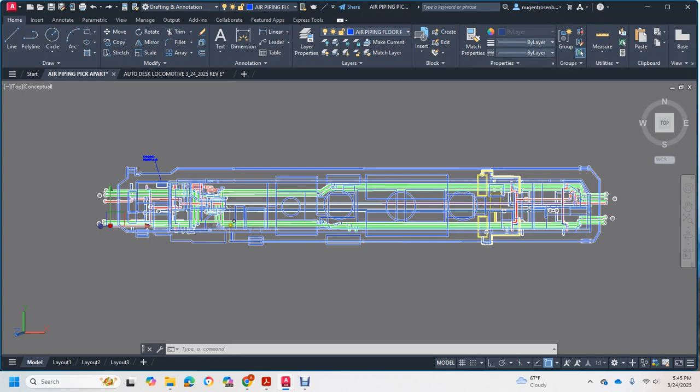Alright, the blue is basically the floor plan. I'm going to move up here. I marked all the valves with spheres.

So the red is a sanding valve. This over here, where the cursor is, that's your dead pneumatic, and then blue brake pipeline to the trucks, and green to the controls. And this is the front, and we'll just pick out like a sphere.

Each sphere has a hyperlink, and you push control-click, and it will bring up the different videos. I've made each one of these maintenance videos.

You may not be able to hear the audio because it's on a recording and I'm using the microphone, but these would be the ball cutout cocks.

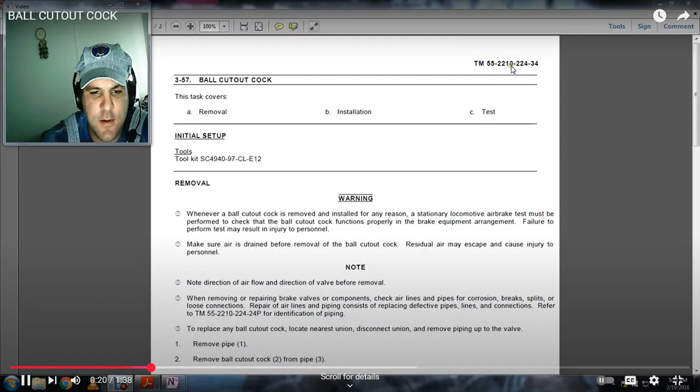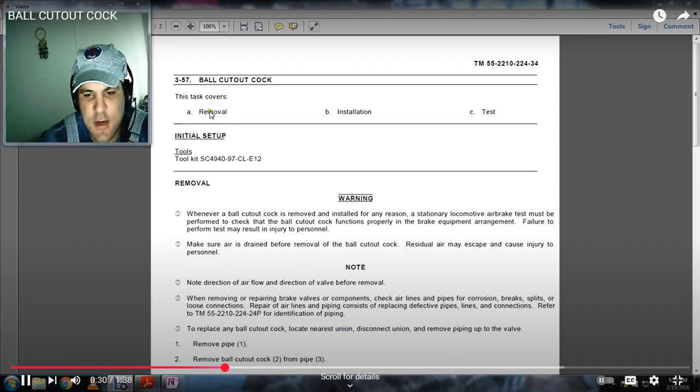It goes, this would be TM 55-2210, the MSN is 2210 for diesel freight, 34 tells you it's a technical manual, 55 is the series, and this one covers removal, installation, testing, and we can skip it ahead.

I took it, there's me, this is years ago, and so here would be your ball cutout cock on a Davenport, and it goes over the installation and repairs, so let's just pick a different one.

So up here we have the sander valves, let's just click this one, see what it brings us to. We've actually opened up what's known as the cutout cock strainer, and I clicked that 3 times.

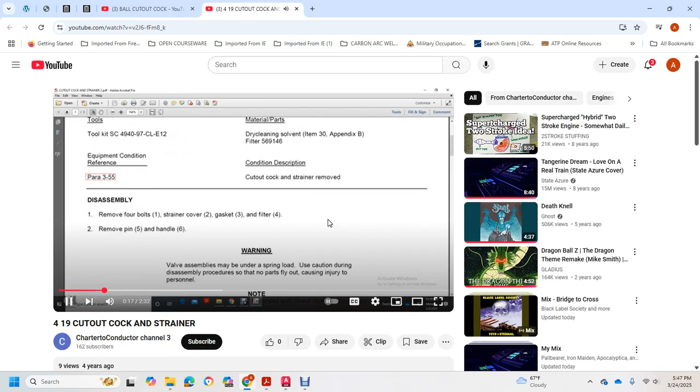Let's see if we can see any more pictures. And it gets exploded right about here.

So basically, most of the air piping schematic has never been changed, and it tells you how to do the maintenance and repair and disassembly.

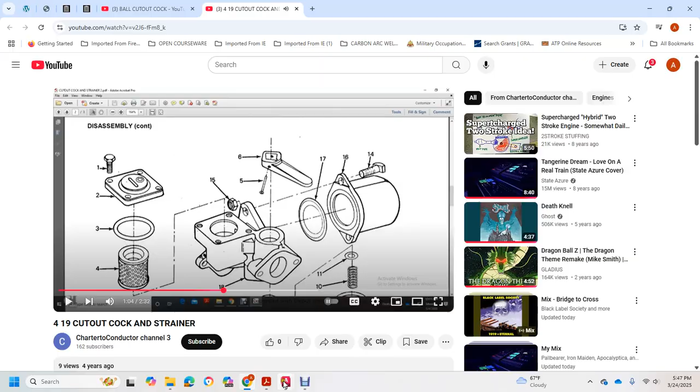So basically, this is all hyperlinked together. Each sphere is a different valve, and it's all hyperlinked. Blue goes to the pipes. Red is your sanders. Green is your controls.

And then this shows, if you follow this line here, this way and this way, you can see that it's a double control stand.

So I split it in half, and then we'll pan to the left. It travels down about halfway, and then you would meet a cutout cock on the sides over here by the fuel pump somewhere, and you could dump the air in case of emergency from there.

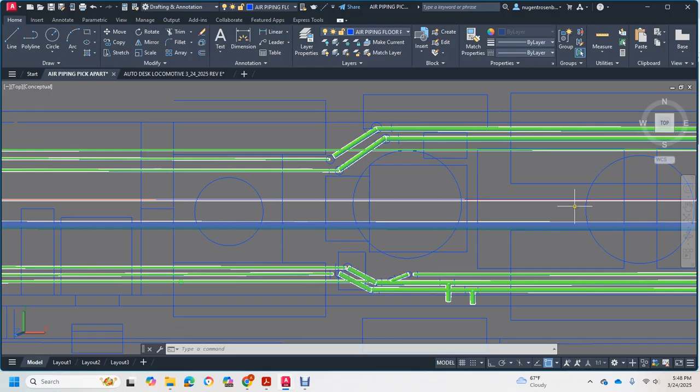And then we move on to the rear, and like I said, the green is the airline, blue is the trucks, red is the sanders, and then yellow over here shows our air compressors and our air reservoirs.

Let's just click on one of the red ones real well. Let's see here, let's click on the green one.

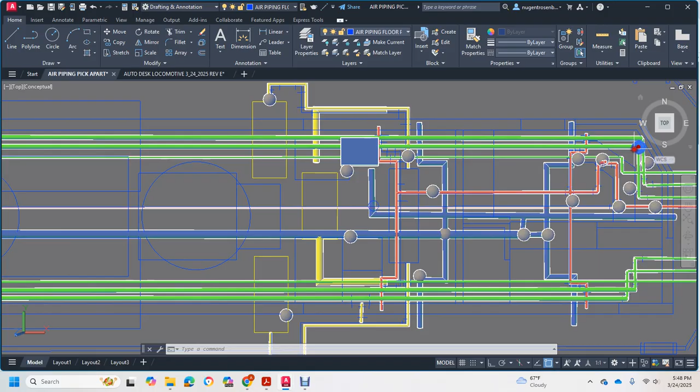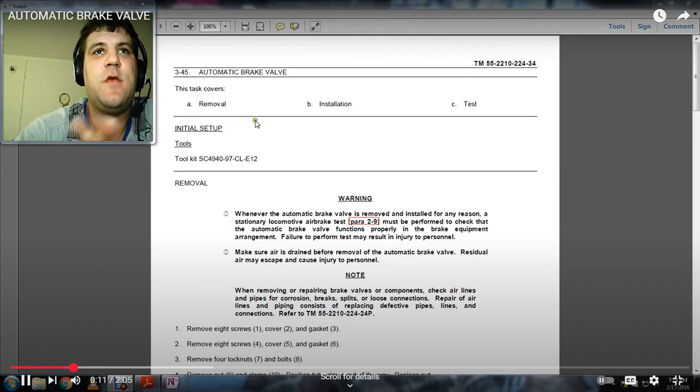It's 2 minutes long. I don't know if that's coming up, but removal, installation. So all the maintenance work is done. All the brakes are pretty much the same.

Let's see if I can bring this up real quick. Desktop, locomotive design, PDF master, CCB diagnostic display.

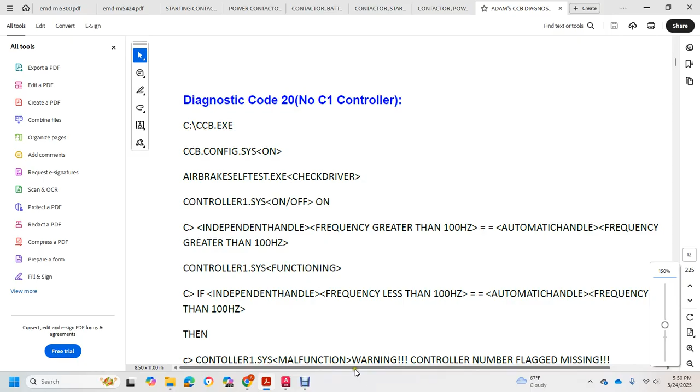It goes over independent handling, your independent handle, your frequencies, and I wrote a couple of DOS programs for my thing. Basically, it controls the fault code, and you can reset the air compressor, or it will send an air control valve to a fault bin for later opening in a text version viewer.

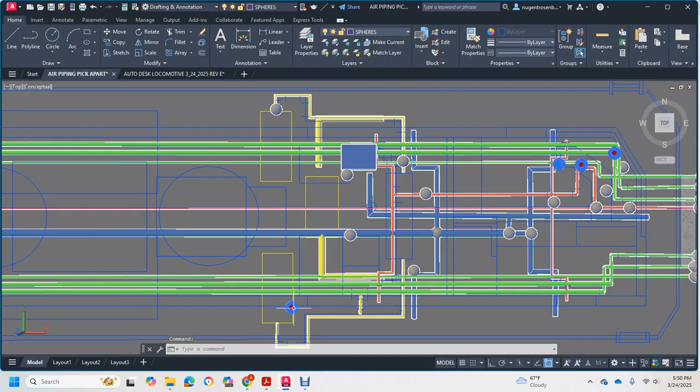And we'll go back to the drawing real quick. So yellow, let's see here. Alright, yellow would be your main air reserves. Here we have a main air reserve draw.

These are all hyperlinked. I can't believe it's got 590 views. It was 9 years ago. I can't believe that, you know, I barely have any views.

Anyways, that's the main air reserve, and there'd be an auxiliary reserve for your windows, horn, bell, and I can't think of the other one right at the moment.

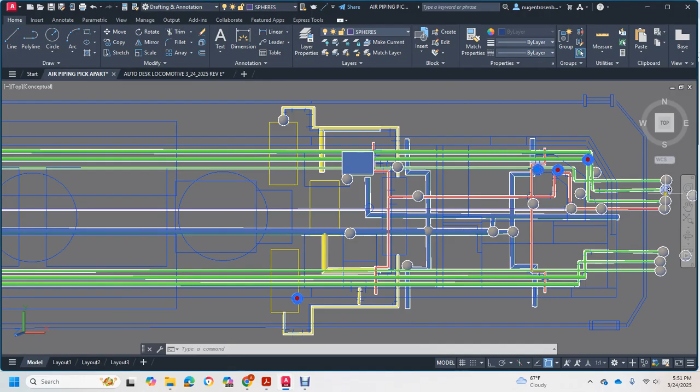Anyways, so we're gonna pan out. Usually it would be your glad hands over here for multiple unit connections. Blue to the brake valves, red to the cylinders, yellow to the auxiliary.

And then in this top left corner you have a control stand, and up in the front, so we're actually a triple control stand on this. And then over here is your main reservoir and your exhaust valves. So you could, here's the red one right here.

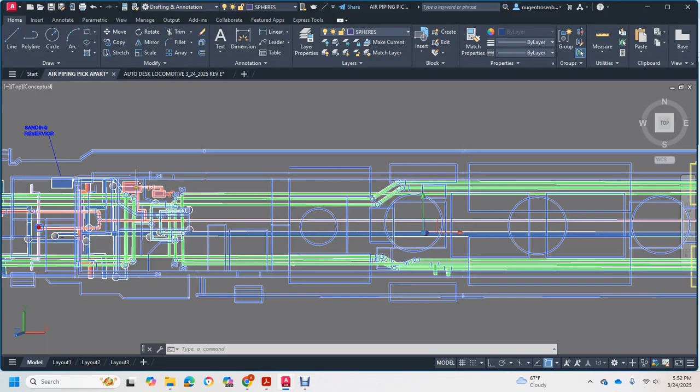Let's see if it will bring it up real quick. It's starting to get really slow. I guess I'm running too much.

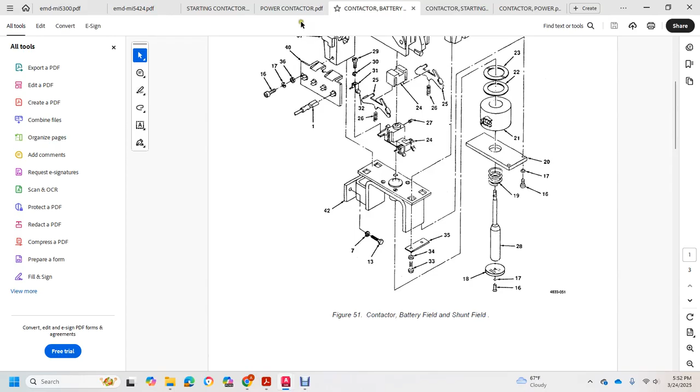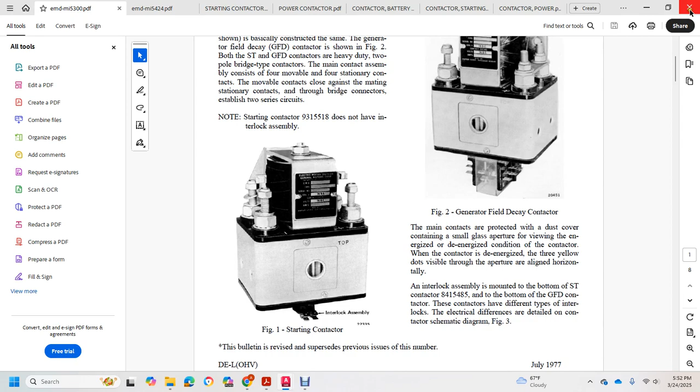Anyways, I plan on doing, I have a couple different ones. This is a contactor power. I'm going to do that. And then there's a starting contactor. So I'm going to try to learn as much as I can about contactors. We'll come back and I'll show you the reference papers. I'm going to try to learn how to do it, I've read about them, but I've never drawn one. So that's what's kind of missing, but you can use the same part reference.